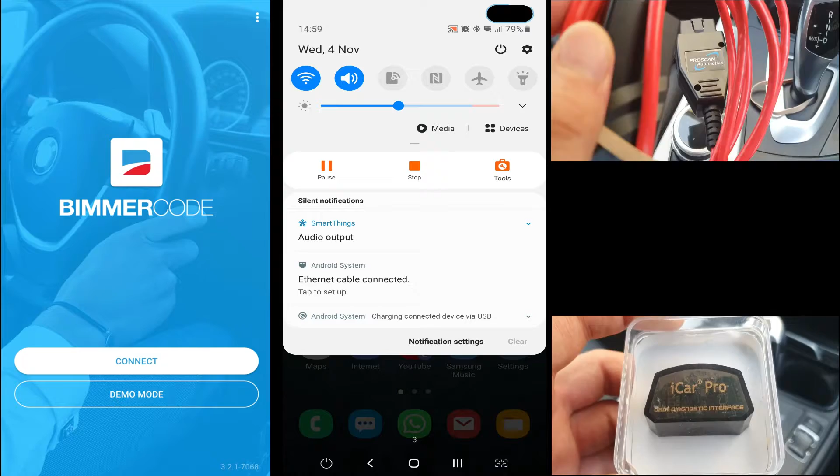Some of us are already familiar with the Bimmercode application, which can support Ethernet cable and Bluetooth adapter. In this demonstration I'm going to be using an Ethernet cable, which is much faster and more reliable. After connecting my Android phone via Ethernet cable, I make sure I'm checking the settings and picking the correct adapter, and these are the other options you can use to make the connection with your car.

After choosing my car, Bimmercode is going to make the connection. This is the actual connection speed - very fast compared to Wi-Fi or Bluetooth adapters. That's why I'm choosing this method.

This page shows you all the available control units that can be coded in your car. Clicking on the little car icon in the top right corner gives you further information about your car, its specifications, and whatever is available in your car.

All we need to do is scroll down and click on a control unit. In this case, let's pick KOMBI and see what we can actually code and change in our car using Bimmercode. These are the options within your instrument cluster.

Let's change a parameter and then make the code in. Once you click on code, your iDrive screen is going to restart and make the changes ready for you.

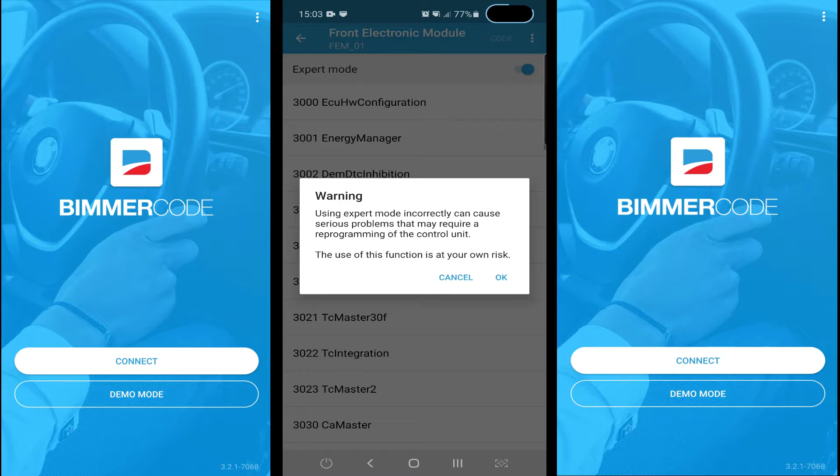One thing I'm going to talk about is the expert button. Lots of people talk about not using that, and I would say if you don't know what you're doing, don't use it. But if you want to go into depth in your coding sessions, you should know what you're doing.

Certain numbers matter - for example, my iDrive screen was upgraded from 6.5 inch to 8.8 inch. The only way to code it and make it work was to use the expert mode in Bimmercode.

Another thing I'd like to talk about is certain features that you code which may not work in your car. For example, my cluster animation was set to M performance, and unfortunately, because my car doesn't support this feature, although I set it to M performance, it didn't really show up on my instrument cluster. So if you see something that doesn't work in your car, it's not Bimmercode's fault - it's probably that your car doesn't support that feature.

Now we're moving on to another subscription-free application called Bimmerlink. This session is going to be demonstrated using a Bluetooth adapter, iCar Pro.

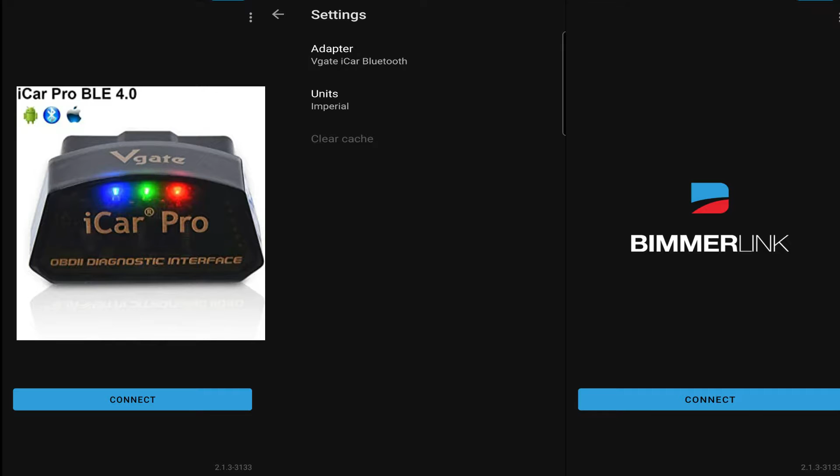Again, the connection is slow compared to Ethernet, but Bimmerlink still supports Ethernet cable as well. This application allows you to read all sorts of fault codes in your car and trigger certain service functions, helping you maintain your car in certain situations.

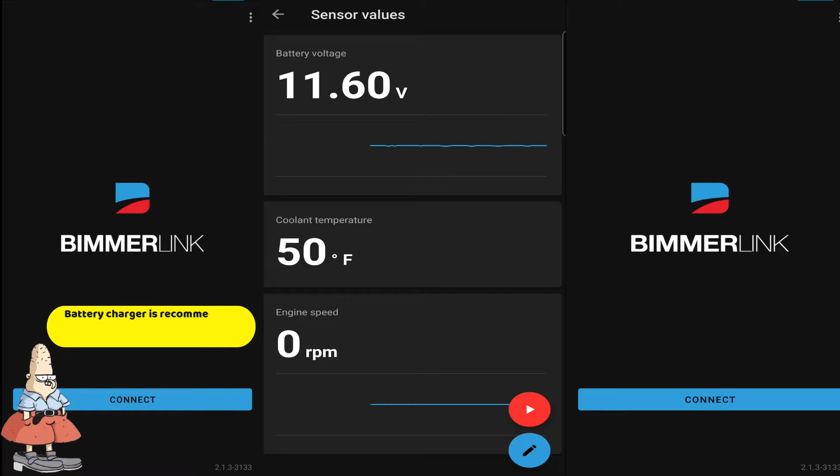Again, there are lots of different options that you can modify and adjust based on your needs, and see all sorts of different parameters in your car and carry out certain maintenance to look after your BMW.

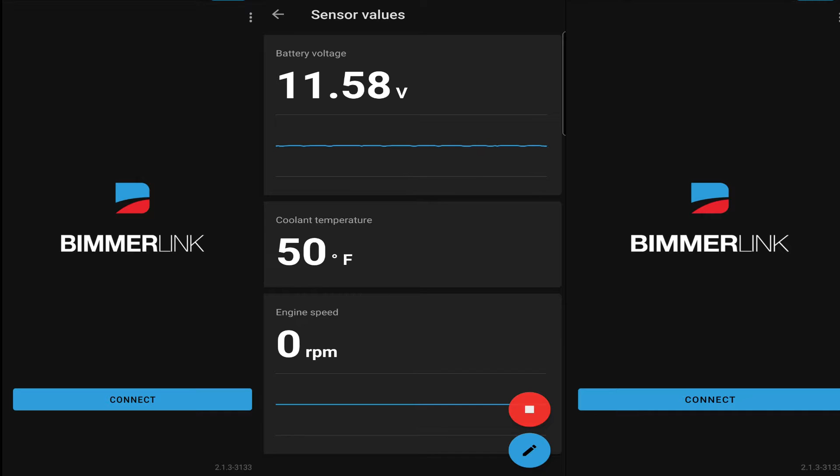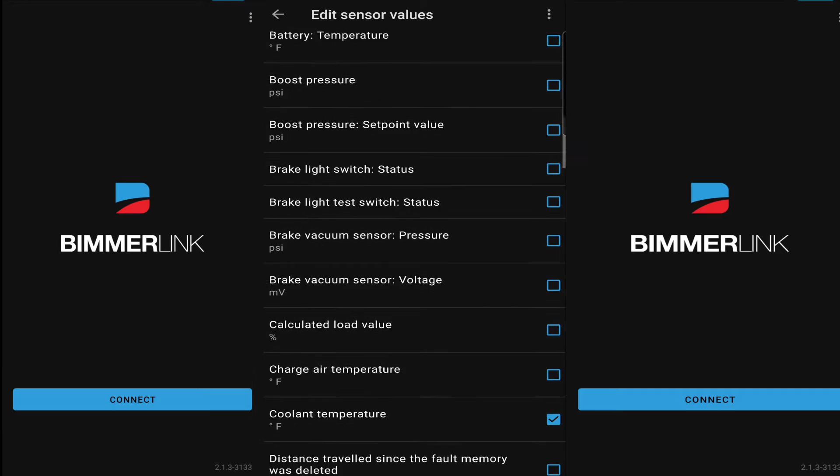As you can see, there are a variety of options you can customize and make it very personal. On the dashboard, you can add all sorts of different parameters, whatever you would like to see in your car. These are the main things that we see in our BMWs. Each ECU is connected to many different components, and they're all visible on Bimmerlink's screen.

The speed of reading error memories using the Bluetooth adapter is not bad, but again, an Ethernet cable makes this reading much faster.

I keep my Bluetooth adapter in my car's glove box just to have a quick read every now and then. Instead of connecting BMW's ISTA application using your laptop, this can be a very handy little tool and software to read certain fault codes in your car and then take action accordingly. And it's always good to see all green lights, meaning that you don't have any fault codes in your car.

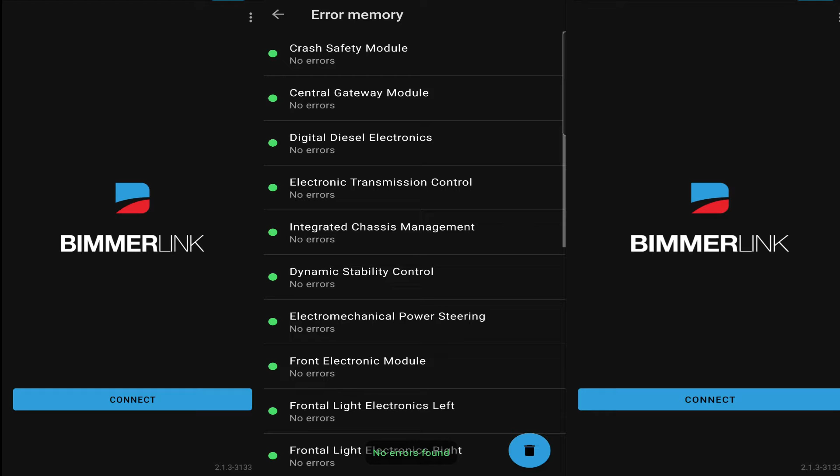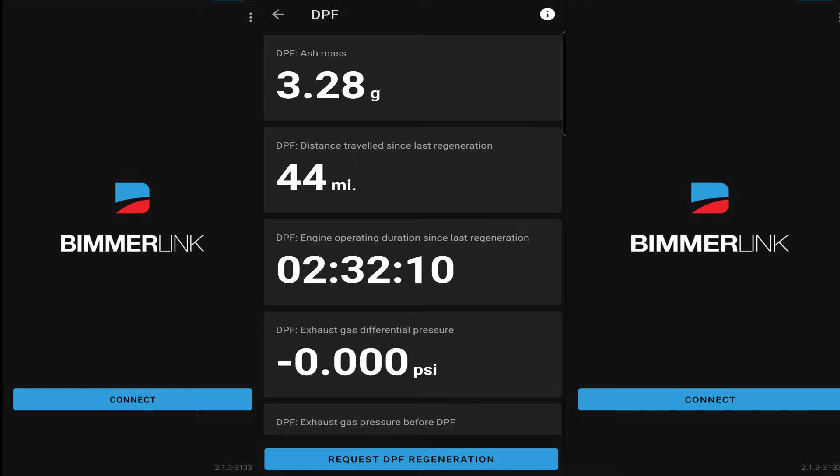Because I'm a diesel BMW user, Bimmerlink also gives you the option to read your DPF filter's actual state. So if it needs regeneration or DPF cleaning, I look at the numbers and then take action accordingly.

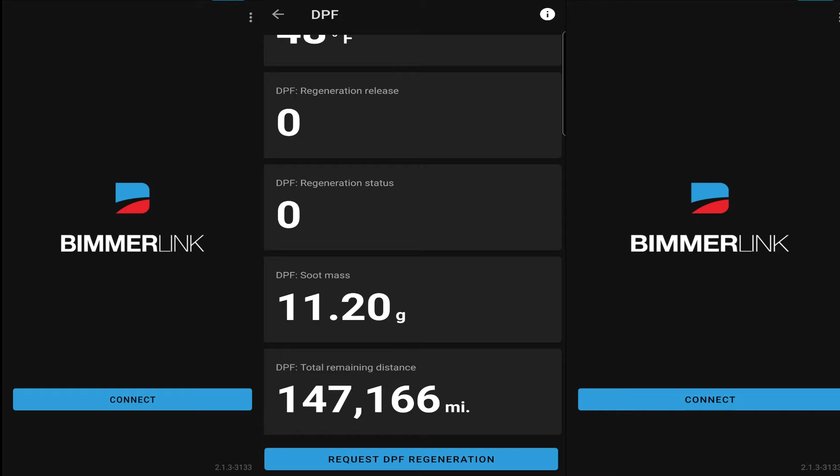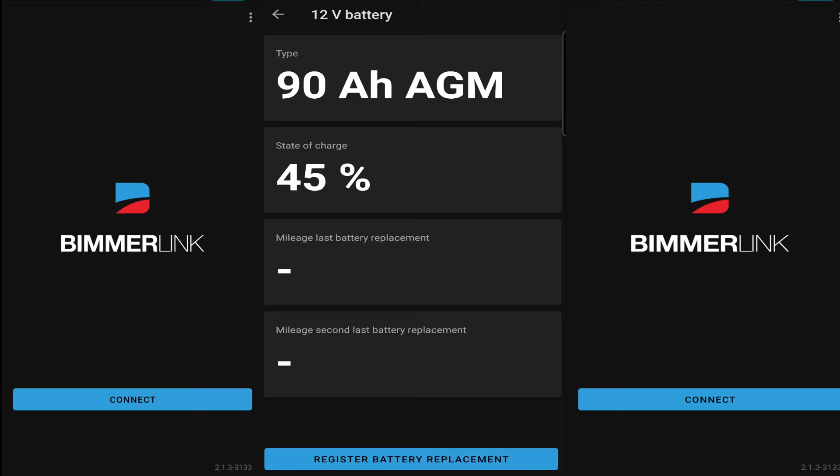This is my battery state at the moment, 45%, because I've been in a video session for a while now. It goes down quite a lot. That's why I recommend you use a battery charger if you're using these applications in long sessions.

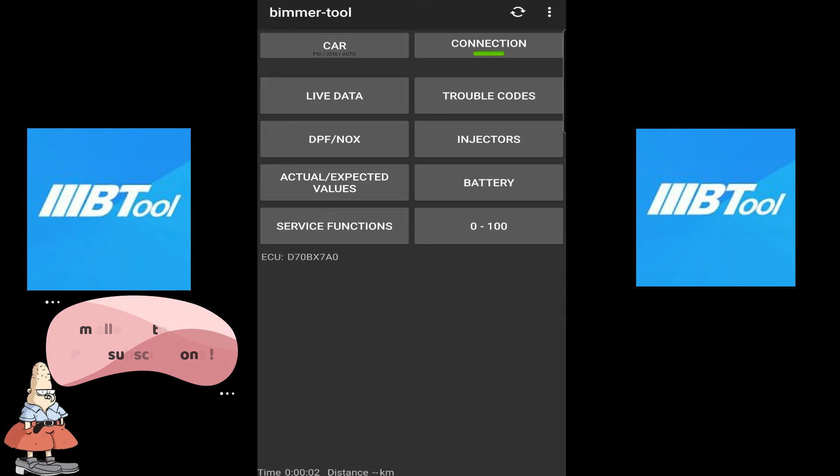The last application is going to be BimmerTool, again very similar to Bimmerlink, and also another subscription-free application. Once you make the connection using our Bluetooth adapter, which doesn't support Ethernet cable by the way, you'll see your information on your phone screen.

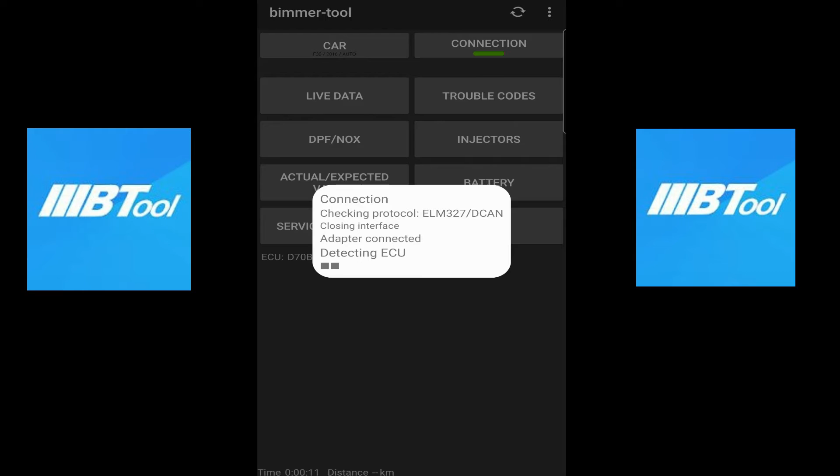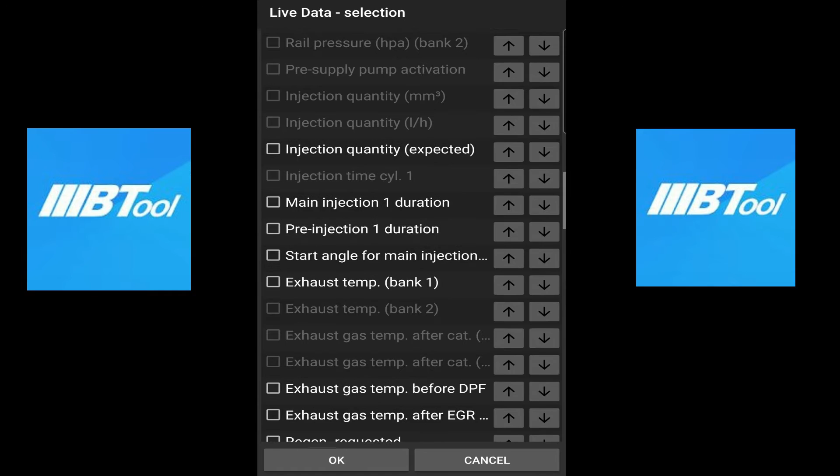And you can easily see your live data in one screen. It can be adjustable. You can move them up and down, or whatever you want to see, you can adjust it, customize them, which is what I like about these applications.

The price is slightly cheaper than Bimmerlink, but again, the options are very similar. What I like about DPF monitoring on the BimmerTool app is that it shows you the percentage of your soot level. As a diesel driver, this is what I use, one of my favorite applications that I use on a regular basis.

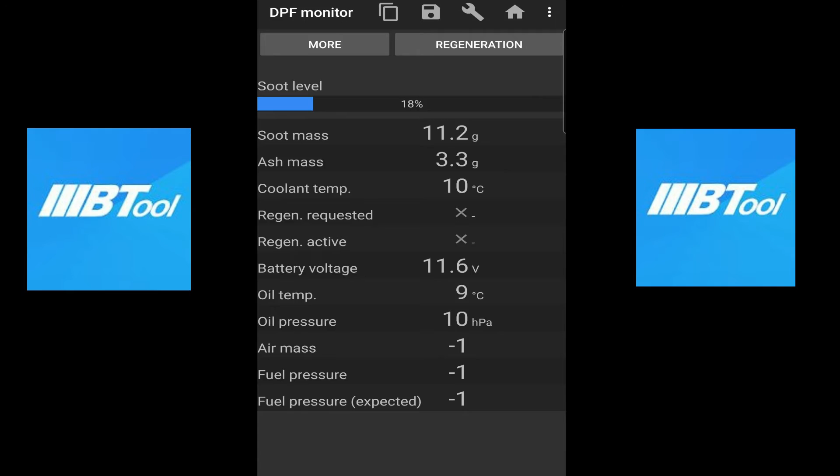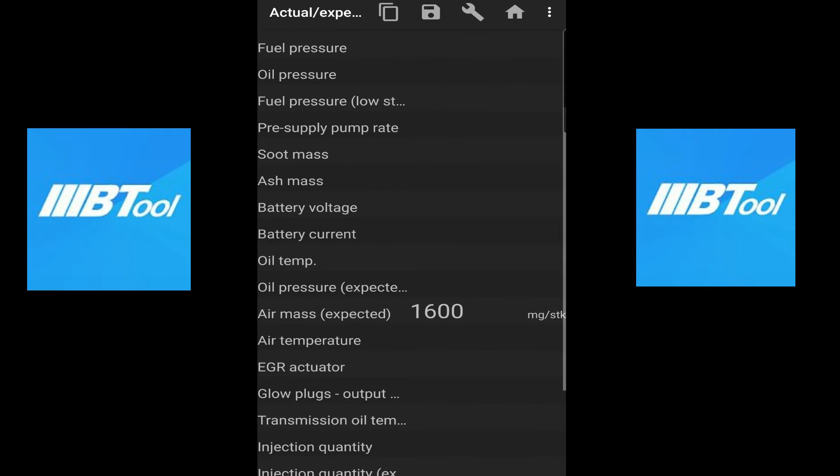You can move on to other options, actual and expected values in your car. They are customizable to your needs, so you can see if there's anything wrong with your car and take action.

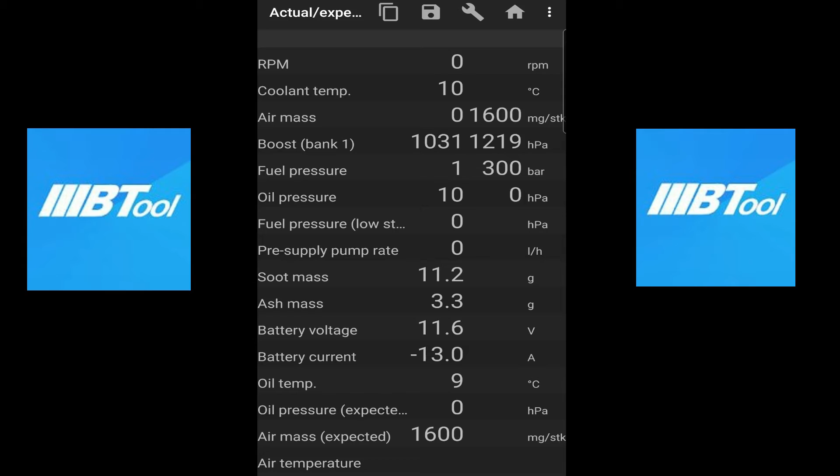Moving on to injector values, you can do certain tests and it gives you a precaution message just to keep you on the safe side. Pretty much all the options in here, test options, give you a warning message. You need to read them carefully before you attempt your, let's say, workout on your car, and make sure that you don't mess up with things.

There are some service functions that you can trigger, which I find very useful. They're organized in sections, but especially in this section, your engine oil service reset, some DPF adaptations, MAF adaptations, glow plugs, and fuel pump activations are really necessary when you replace them.

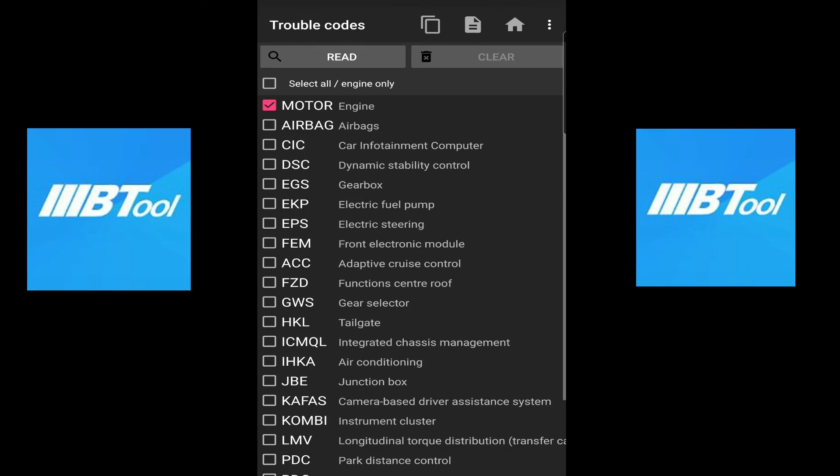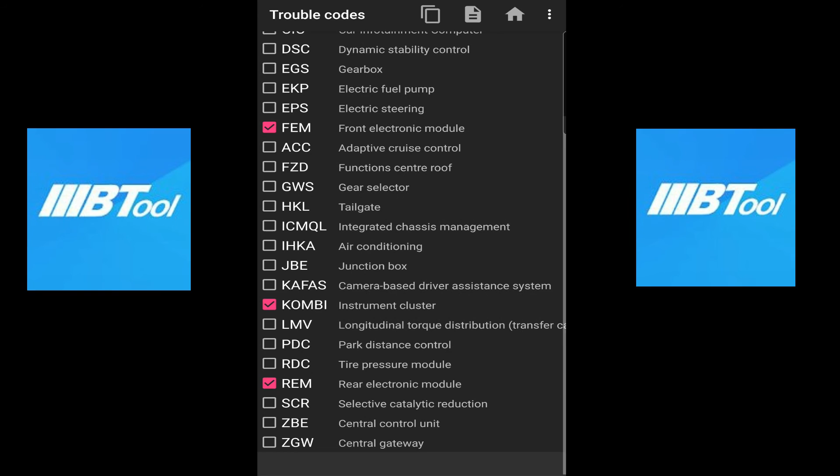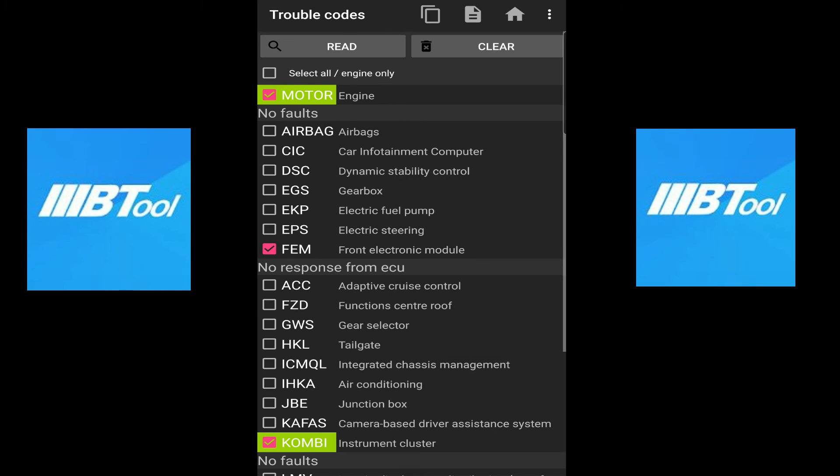The reason I keep repeating the subscription-free options in these applications is because once you purchase them and the adapter or Ethernet cable to make the connection, you can use these applications on any BMW car in the future. There are no restrictions. That's what I love about these applications. I remember some other applications charge you for each service function. Even if you purchase them in the first place, they still charge you for the service functions when you want to carry out certain things in your car.

Each of these applications has lots of other options, but it would take hours to demonstrate every single one of them. That's why I wanted to combine them in one video and give you some bottom lines, important parts about these applications. Before I go, I highly recommend you do some research before using these applications. They are mostly fail-safe, but again, don't attempt anything if you don't have proper knowledge about it.